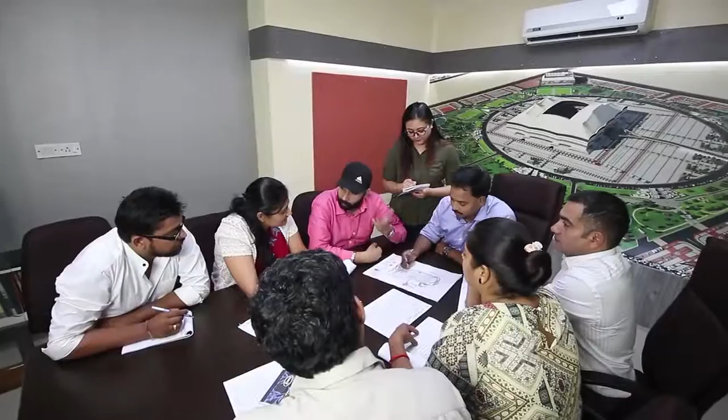As part of this, in 2007 or thereabouts, we came across BIM as a very powerful tool. With BIM, you are essentially delivering the project twice, once in the virtual mode and once, of course, during the final construction. All the clashes, the unpredictability of coming across something during construction and then having to stop, on big projects that can mean a lot of money lost. It can mean serious contractual escalations. It can mean delays, etc. So as projects got bigger and more complex, we thought of applying BIM.

Another reason for bringing BIM was that in the olden days, buildings were mostly orthogonal, which means they were essentially cubes or cuboids. Architects were aspiring all the time to have free forms or more natural forms in buildings. Now, how do you deliver that? Defining a free geometry is not easy. So with BIM tools, this is becoming better. Also, to maintain the database or the information throughout the life cycle of the project. That's very important. So that was the third area. So with all of that, we started implementing BIM from 2007 onwards, and now we have fully migrated into BIM, and we are getting very good results.

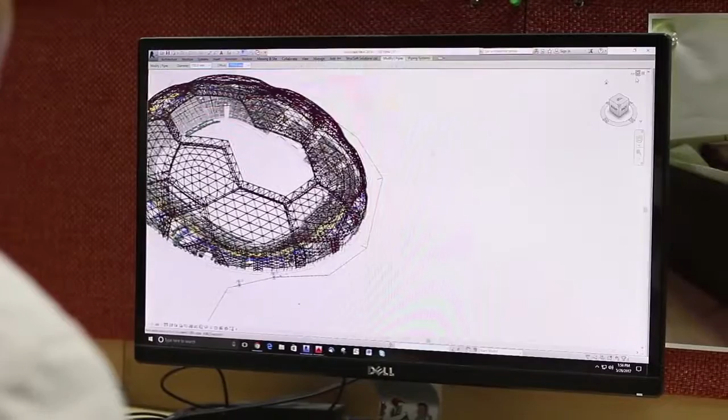In the initial tenders, what I'd like to share with you is that we encourage our clients to build into the consultancy contract a training component. So while we are delivering the project using BIM, we also in parallel train the client staff. So this was in the year 2009.

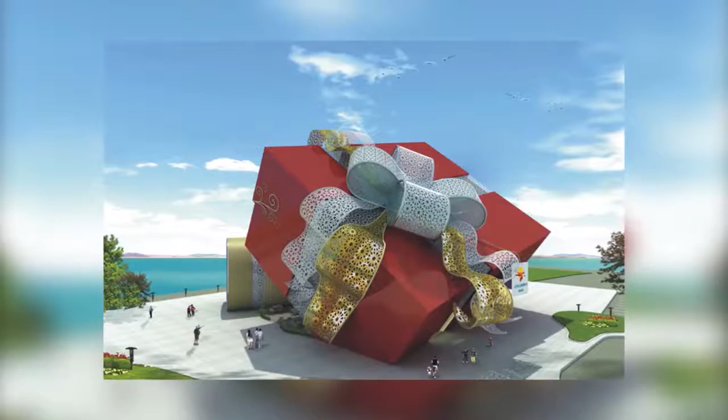So we started with the Children's Mall at Doha, Qatar. The client had got a great looking design done, and he was looking for someone to deliver the GFC package. The design was based on a box supported on a single corner, and there were no verticals in the design. All the walls and the columns were sloping, and there was nothing in plumb. So we decided to use a mix of Revit and AutoCAD to deliver this project. Initially, we modeled the basic structure and the architectural skin of the building in Revit. Then we added the floor slabs, staircases and the cores.

But what we feel now, with the current features of Revit, it would have been a real cakewalk doing this kind of project. Now the project is under construction, it's almost finished, and we still get RFIs because there are a lot of clashes between the MEPs. But still, thanks to Revit, we were able to deliver this.

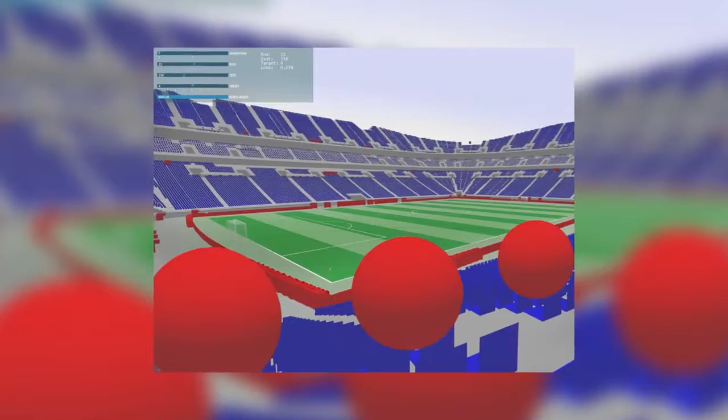Currently, we are working on a number of stadiums for FIFA 2022 to be organized in Qatar, and BIM has found many applications there. In particular, of interest is what we call sightline analysis. FIFA has very stringent requirements for each seat. From each seat, the spectator must be able to see the four corners of the pitch, the goal posts, and there are other associated requirements. So to manually visualize each seat and draw the sightline from each seat is practically impossible. Now, how to do that? So we thought of applying BIM.

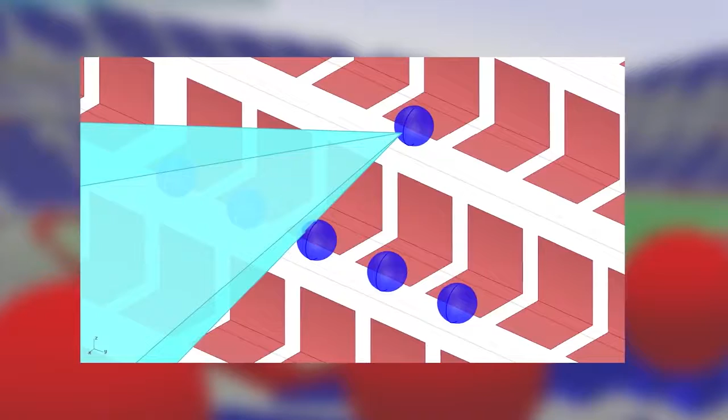Each spectator's face was modeled as a sphere, and from that we set in the parameters, which we call the C value from FIFA, which means the vertical distance each spectator must achieve on top of the preceding spectator. And then, of course, you stagger the seats as well. This is modeled in BIM, and finally we get the end result as a pixelated image. Seats passing the full FIFA requirement are dark green, then lighter green, then shades of yellow, and finally those not acceptable are in orange or red.

The stadium projects rolled out in Qatar currently are 8 new stadiums built from scratch, all at the cutting edge of technology. All the stadiums are air conditioned. This has not been done before anywhere in the world, so all of them are using BIM.

Al Gharafa Sports Club is a Qatari sports club located in the Gharafa district of Al Rayyan, Doha. The current stadium, the home ground of Al Gharafa Sports Club, was built in 2003 with a seating capacity of 22,000. It has been decided to upgrade the Gharafa Stadium as per international FIFA standards. Initially we developed the LOD 200 model of the existing stadium with the help of as-built drawings. The BIM model was extremely useful for us to visualize the basic concept form, and design decisions were taken during the concept design.

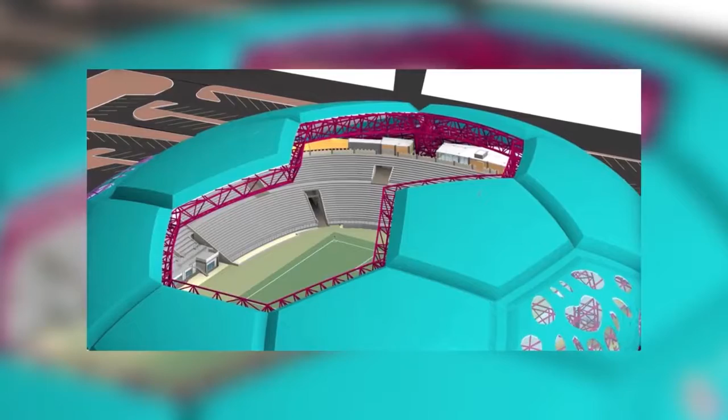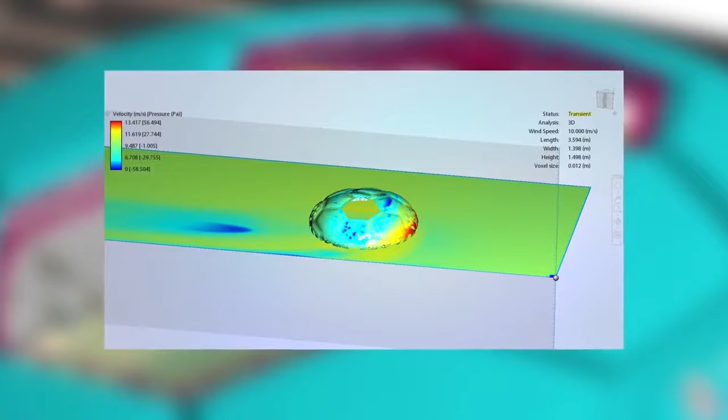To maintain the temperature below 26 degrees on the field and the grandstand area, the use of outdoor cooling was mandatory. Maintaining the ambient air temperature while allowing adequate sunlight was the challenge, while keeping the structure as light as possible. Revit came in handy for us to perform solar study reports, which help us maintain the FIFA guidelines for the use of natural turf. The use of virtual construction through the BIM model results in enormous time saving, since the deadline of the FIFA World Cup, 2022, is very close.

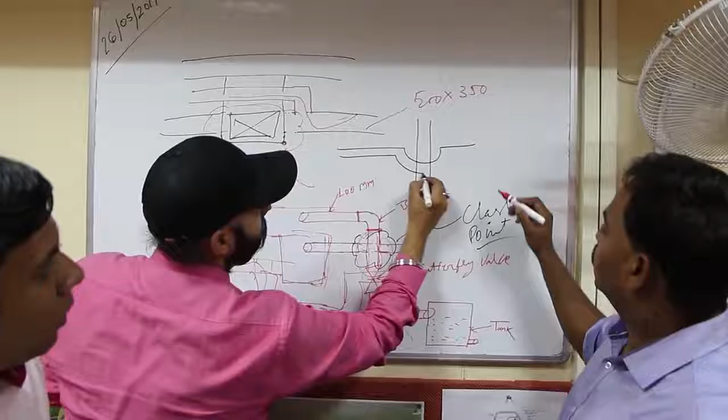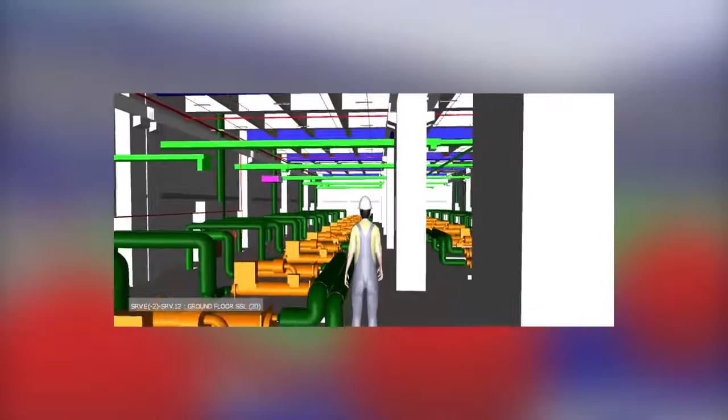Clash detection is an important and integral part of the BIM modeling process. A clash occurs when different elements of different models occupy the same space. It can be between the HVAC model and the architecture model, or between structure and architecture models. Clash detection is done through software called Navisworks. All the clashes are identified and eliminated before the actual construction starts. This provides us a lot of benefits, like saving unnecessary cost, manpower, and most important, time.